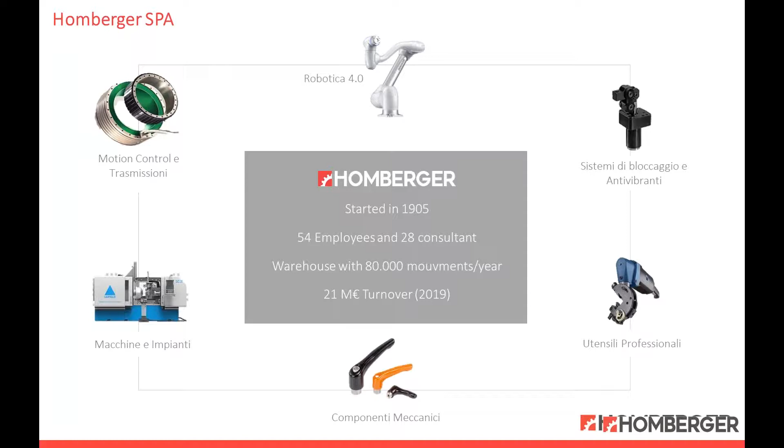This is our robotics business unit. We are the youngest business unit, but we have in our portfolio probably the highest technology available at Homberger. As you can see, we offer cobots from Doosan Robotics, all 3 series. We offer Mecademic, the most compact and most precise industrial robot on the market. Vision systems from Solomon, a 3D random pick system with integrated AI. We are proud to be dealers for OnRobot, one of the widest one-stop shop solutions on the market for light robots. And of course, the Homberger Hub, which is the topic of this meeting.

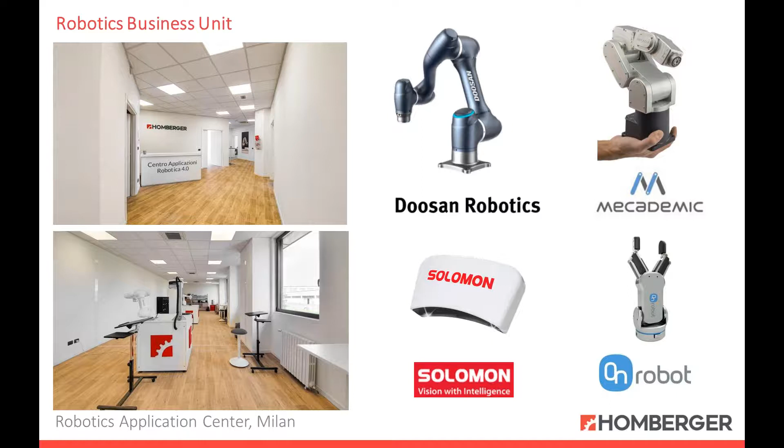On the left, some pictures of our office and our lab. This is the place where all the ideas and features in the Homberger Hub were born. And now, over to Roberto for the Homberger Hub.

Thanks, Matteo. Hi everyone. Let me introduce the Homberger Hub for those seeing it for the first time. Homberger Hub is a software platform to extend Doosan Robotics with additional features and functionalities. When you connect the hub to the robot, you gain Wi-Fi access to connect to the robot, but mostly you gain new functions provided by the apps of the platform. Those apps are RecordBot, VR Studio, and Checkapp.

Setup is super easy - you just connect the hub to the robot, and this generates a Wi-Fi network that you can use to connect. On the other hand, if you already have an enterprise network you want to use, you just connect both the hub and the robot to your network, and you can use your company Wi-Fi to connect to the device.

Okay, so now let's see the apps of the platform, starting with RecordBot. RecordBot is the app of the platform for path recording. Every collaborative robot can memorize and save a single point position, but with RecordBot you can record a whole trajectory, optimize it, and let the robot repeat it. That's why our slogan is: record, smooth, play.

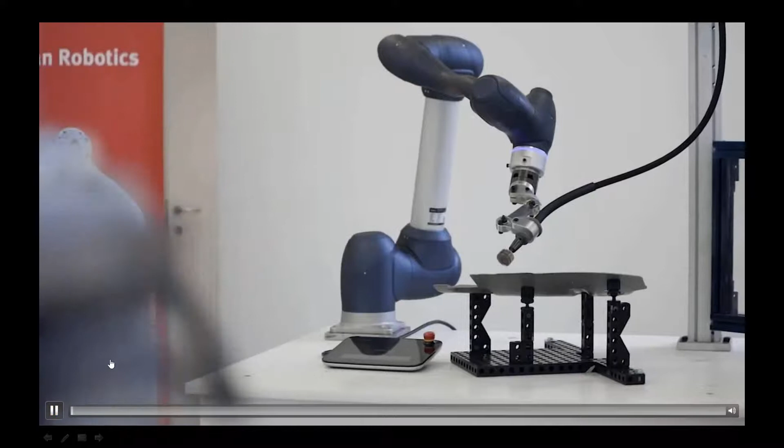Let's watch a video of this deburring application to understand how RecordBot works with Doosan Robots. With RecordBot, you can easily program complex tasks using the direct teaching feature of Doosan Robots. With just one click on the robot cockpit, waypoints can be saved.

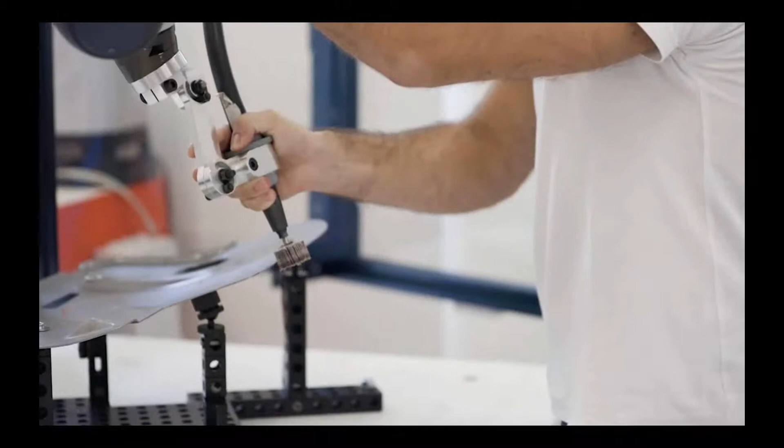With a long click, you can start a recording session. During the recording session, all the robot motions will be recorded - don't worry about movements, velocity, and accelerations. You can even stop and make yourself comfortable.

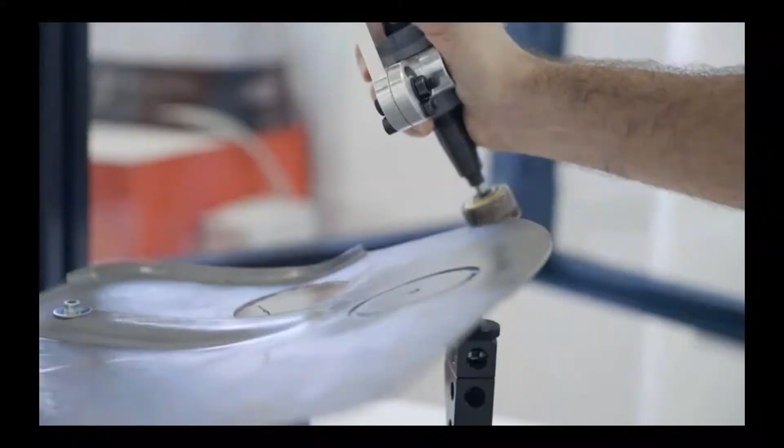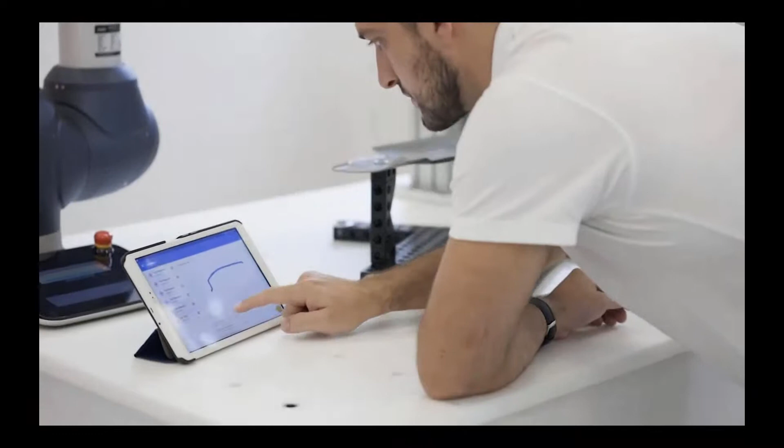With RecordBot, you can easily adjust trajectories later on. Stop the recording session with a long push on the cockpit button. In the post-processing tab, you can smooth your path to remove noise produced by manual guidance during the recording session. You can set velocities, choosing a constant velocity profile if needed, and then test your task step-by-step.

Okay, so you see it's very easy to set up a trajectory using RecordBot. Another interesting feature of RecordBot is simplified force control.

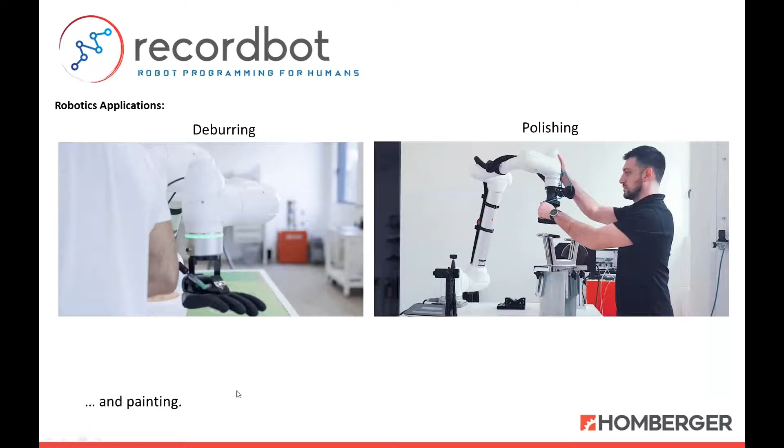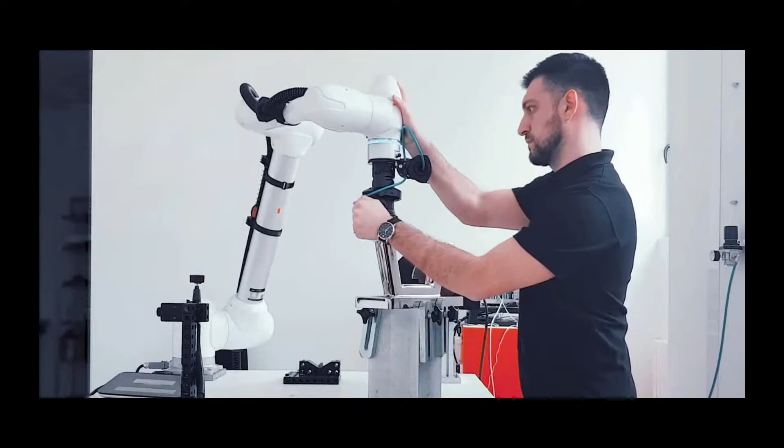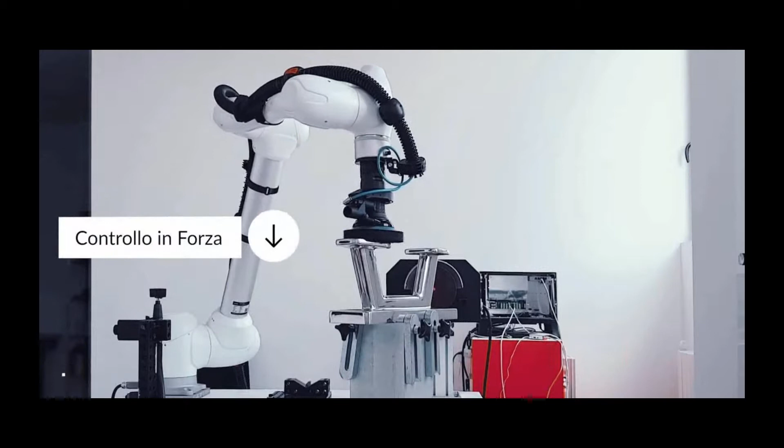For example, in this case, this is a polishing application for a naval component. The operator is recording the trajectory and taking some points, but you'll see when the robot repeats the trajectory, it will also apply force control to grant contact forces between the tool and the surface being worked. So even setting up force control can be done through RecordBot.

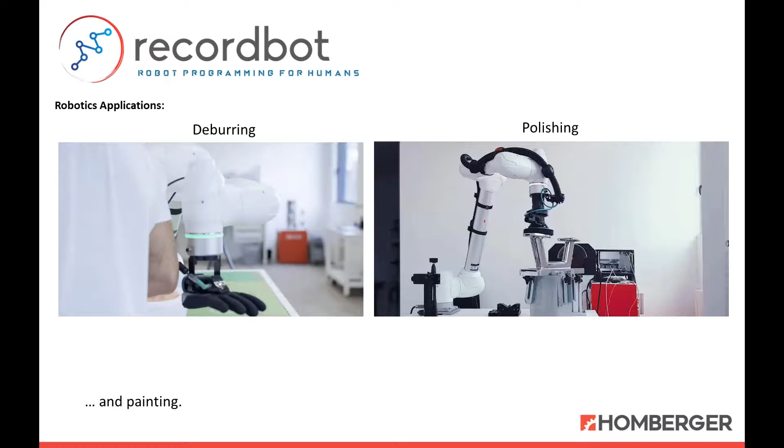As you know, Doosan Robotics can be programmed using Python programming language, and DRL Studio has a lot of features to help you develop Python scripting. For example, you have autocomplete features, syntax analysis, quick fixes, live documentation, smart refactoring, online programming, testing,

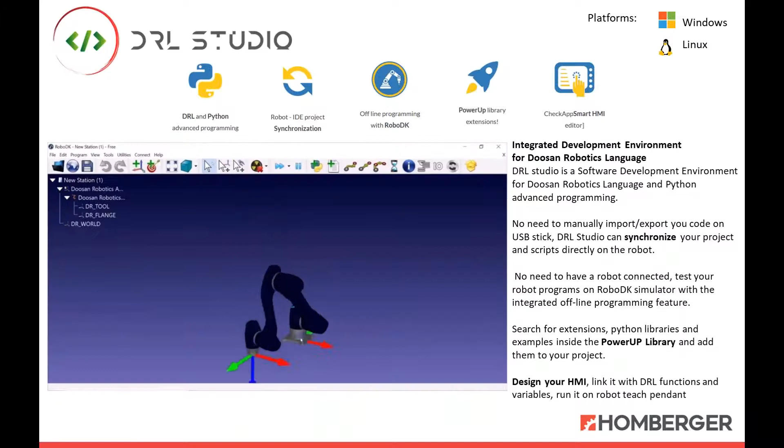logging, and so on, so you actually have tons of software engineering functions to help with Python programming. Then, very important, DRL Studio offers the project synchronization function. So let's say you develop your function, your script, your skill on your PC using Python, and with just one click, you can upload all these Python resources onto the robot controller, and then use them inside the teach pendant, for example with Task Builder or Task Writer.

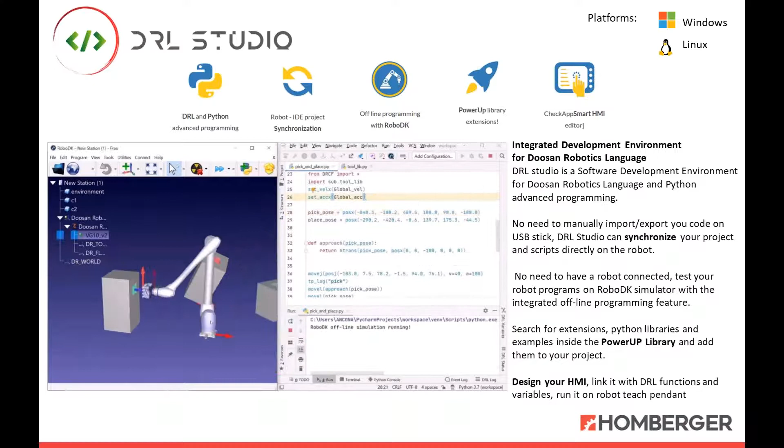As you're seeing right now, DRL Studio is also integrated with RoboDK for offline simulation. So you can test your DRL script inside the simulator, even if you don't have the real robot connected. You can also, for example, move the virtual robot inside the simulator and go on programming.

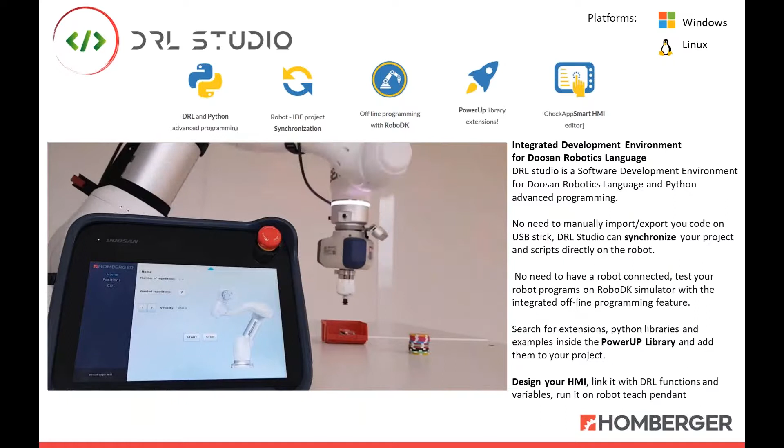In this period of COVID, it's very useful because you can stay at home and go on with application development, then test the real application on the real robot just when you have finished it. Finally, we add two new features of this new release: Power Up Library and Smart HMI. We will see a live demonstration of Smart HMI Editor at the end. For now, let's focus on Power Up Library.

Power Up Library is a space inside DRL Studio where you can download power-ups from the cloud. Power-ups are basically Python libraries that provide specific functions to the robot. You can add a power-up to your project, and each power-up comes with dedicated documentation, so you can check the live documentation to understand how the new function works.

Let me explain a little more about this power-up. For example, the motion lib power-up provides additional motion functions, such as integrated pick and place operations. You also have kinematics commands to check if a certain point is reachable or if it's in a singular configuration. This is very useful because you can know in advance if a certain position will not be reachable or is singular, and so you can implement strategies to avoid them.

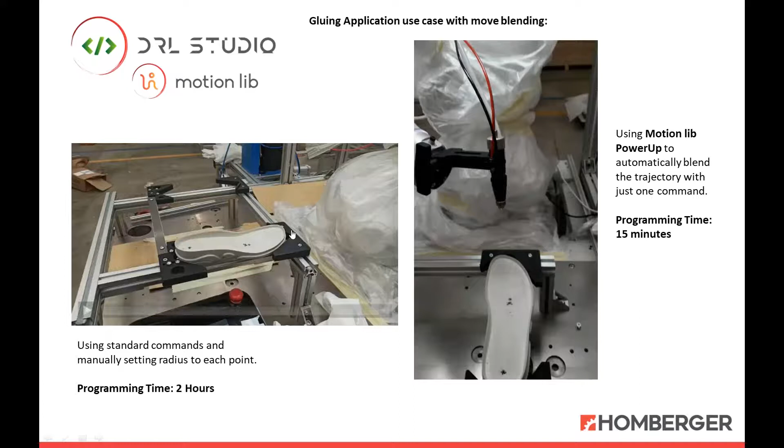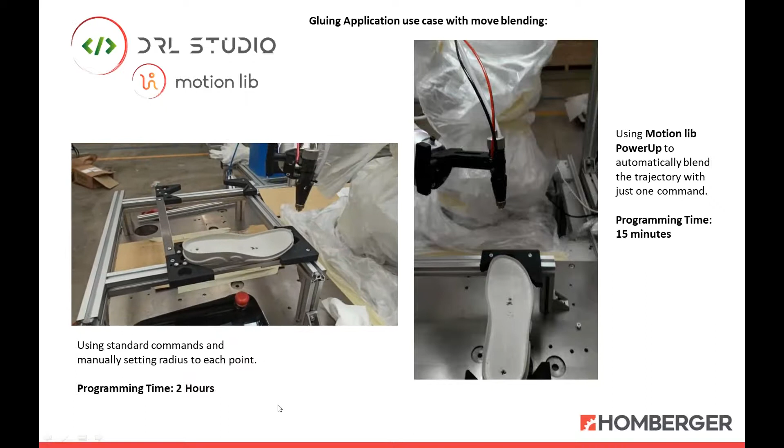Let me show a real application of this function. This is a gluing application, and here on the left you'll see the case where the motion power-up has not been used. We took all the points of the trajectory and spent a lot of time setting the correct blending radius for each of these points. So programming time was very long, and the outcome was not very good because we got this kind of stop-and-go trajectory that was not very optimized.

Instead, here on the right, you'll see the same points, but in this case we used the motion power-up to automatically calculate the blending radius for each point of the trajectory. So programming was super fast, and you can see, even if the streaming quality of the video isn't great, that the trajectory is actually very fluid, very smooth.

As you can see, the trajectory has a lot of points, more than 200. This is a useful command if you have long trajectories, because there's no maximum number of points set for the trajectory. You can have any number of points composing your trajectory.

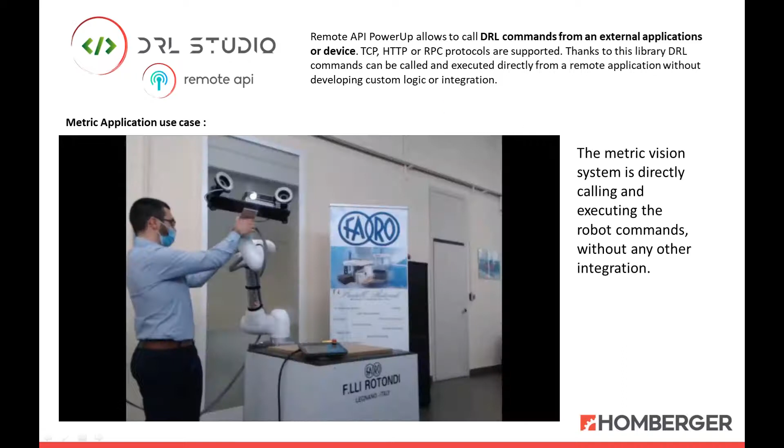I've got a real application example of this technology. This is a 3D vision scanning application developed by our partner Fratelli Rotondi. In this case, it's directly the software of the vision camera that is calling the commands from the robot, saying, okay, move J here, move L there, enable manual guidance.

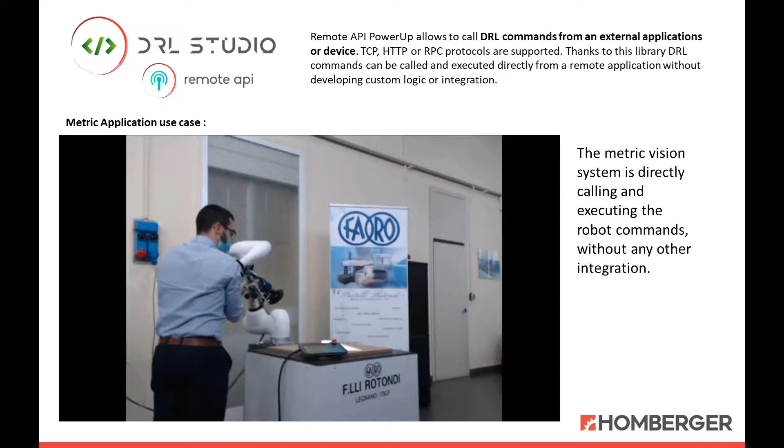So a lot of commands were integrated directly in the software of the camera, without any need for any other integration or protocol.

Then, of course, we have some third-party power-ups for third-party systems. For example, with the OnRobot power-up, you can control OnRobot devices directly. No need for digital I/O, no need for Modbus, no need for Doosan skill. You just have all the functions to control the device directly, provided for the Python language.

You see here we have RG2, RG6, Sander, 2FG7, and VGC10 that have already been integrated, but soon we will have all the other tools added to the power-up.

And then we also have support for the Solomon Vision System. Solomon is a vision system for random bin picking applications, and you can use the power-up to let the robot be a master and command the vision system as a slave, developing your vision application in a very optimized way.

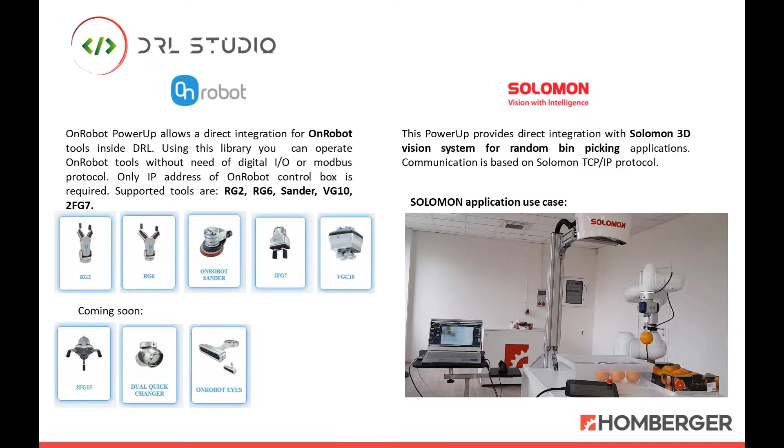Okay, so the power-up library is actually a tool for the community, and we really believe in this approach. So you can enable developer options in DRL Studio, become a developer, and realize your own power-up. And this is very simple.

With just one click, you can turn your Python script into a power-up. At this point, you can choose whether to provide your power-up to end users, or you can also choose to share the power-up with the community.

If you share your power-up with the community, the Homberger team will review it, test it, and evaluate it. Based on how good it is and the functions it provides, we will assign berry points, which you can earn. At the end, your power-up will be published on the official repository.

And you can use these berry points in exchange for free Homberger Hub, and then, of course, start again. So as you see, we really want to let the community grow, and we have this program to reward you for your effort in developing power-ups.

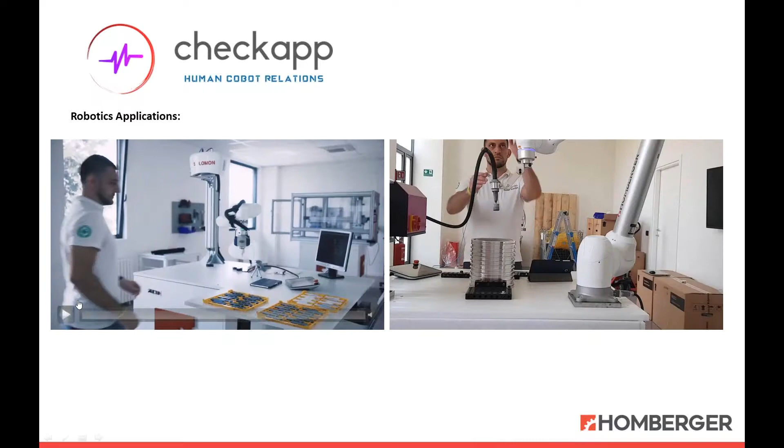Finally, we have the last application of the platform, that is Checkapp. Checkapp is the app for smart human-robot interaction. With this application, the operator can directly check and monitor the status and process of your robotics application, and also actively interact with it for setting up parameters or tasks. I will show you a video that explains how Checkapp works.

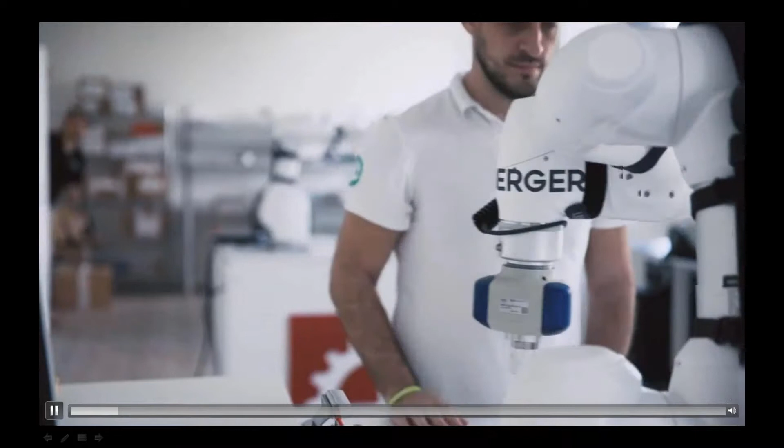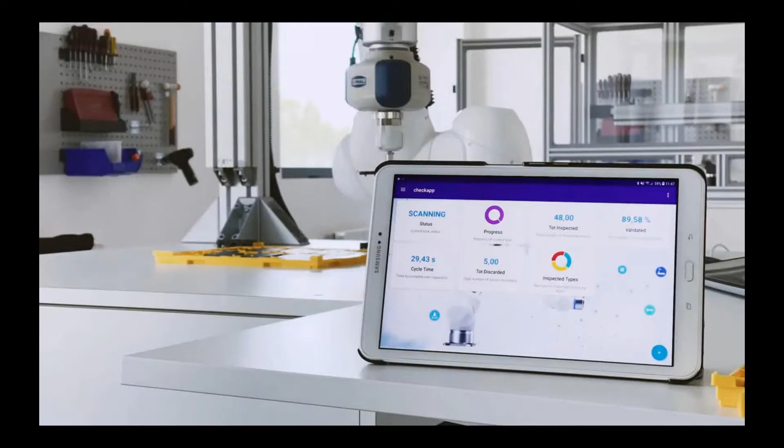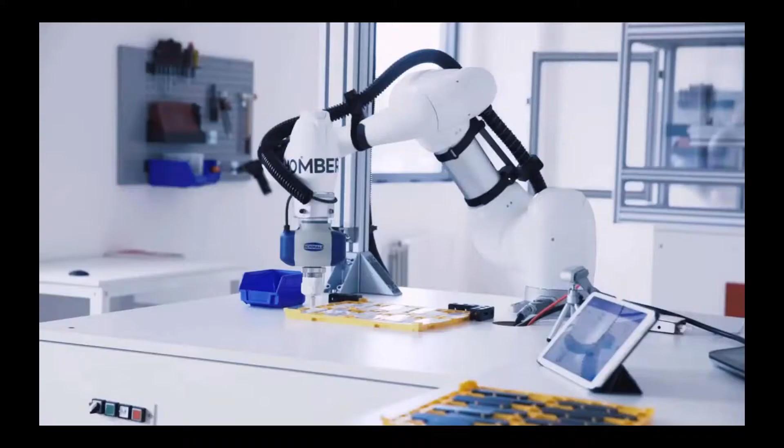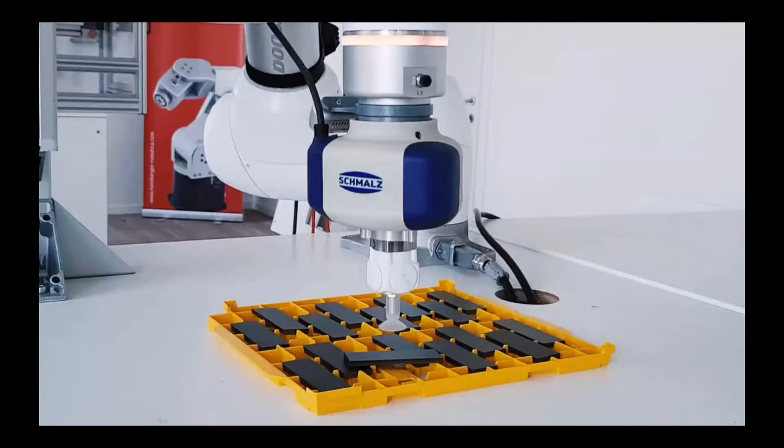Applications are becoming part of our everyday work life. Checkapp is the app for Doosan Robots that helps you build a true smart human-robot interaction. With Checkapp, you can monitor your production process and have instant insight of what is going on. No constraints - any parameter, data, or variable can be measured and viewed on real-time charts. Thanks to Checkapp, your robot is smart. It will send messages directly to your smartphone when human activities are needed. Use the flexible task mechanism to achieve variable and customizable production. With Checkapp, you can easily change process parameters, choose recipes, and organize your robot tasks to reach your daily ever-changing goals. Focus on what really matters to your business. Go on with your activities and let the robot ask for help only when it's really needed. With Checkapp, you can remotely monitor the robot task and receive notifications directly on your smartphone to handle stops and safety events. Enhance your Doosan robot with true smart interaction. Checkapp - human-robot relation.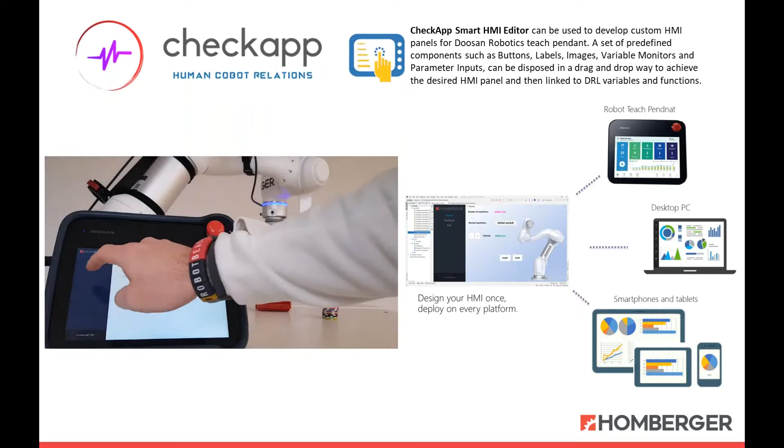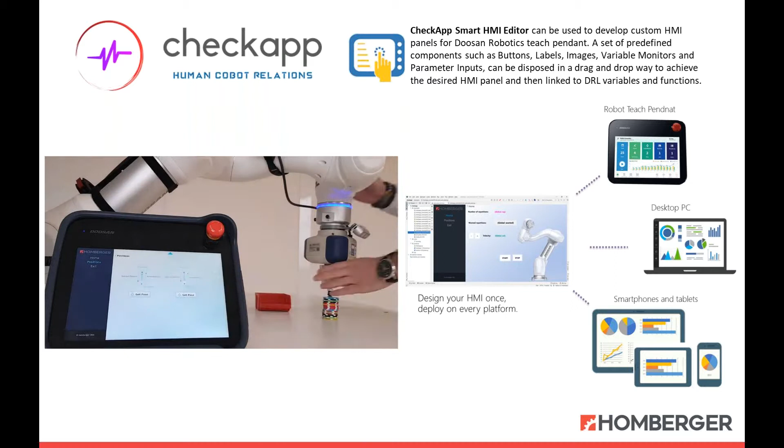Okay, so this is how CheckApp works. Now let's focus on the real new feature of CheckApp, that is the HMI editor. As you've seen, you can develop your custom user interface using DRL Studio, and then deploy this interface on the robot teach pendant, on a desktop application, or on the CheckApp smartphone application. The slogan here is: design your HMI once and deploy on every platform. I will show you a live demonstration of how it works.

So I will open the RecordBot Studio, and I will create a new HMI file. So this is a blank HMI screen. I can add some text to it - for example, I can say this is my text.

In this drag and drop way, I can place it wherever I want. Then I can add a button, so this is my button. And I can link this button with a DRL function. This can be a function provided by the robot, or it can be a custom function that you have defined - any DRL command is fine here.

Then you have some variable monitor component, so you can keep a variable monitored. You put here the name of your variable, and this will be updated in real time with the value of this variable.

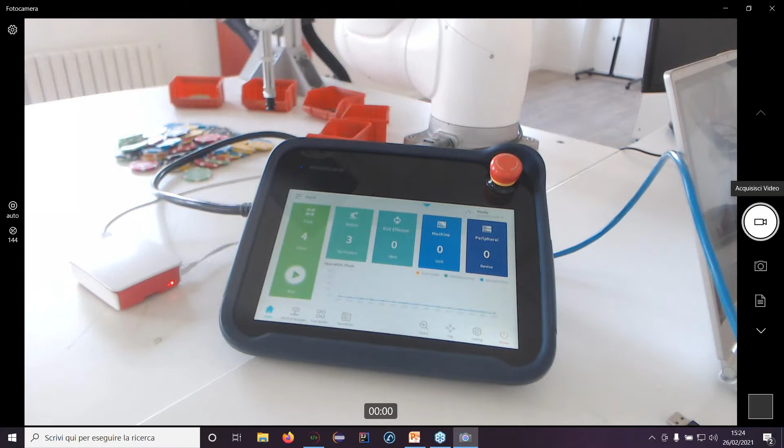And I will try to show you how it looks. So this is a robot teach pendant - this is the standard interface of Doosan. When you launch a new HMI, this is your custom HMI.

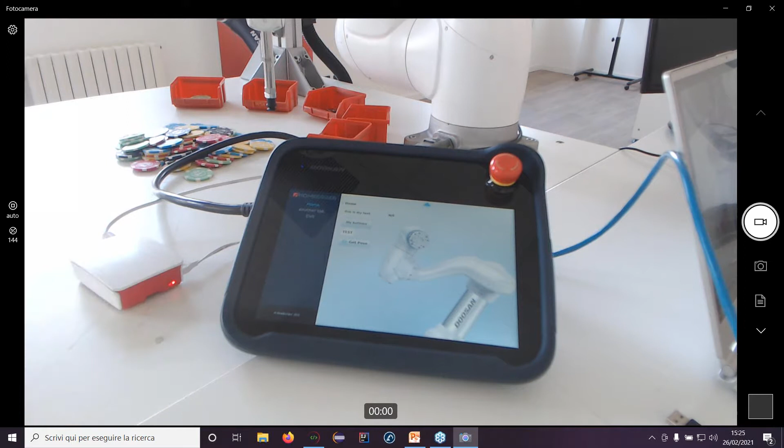So you have the buttons that we have inserted, and you see the operator can insert some text. The operator can take a position and can interact with the application. So it's very easy to set up and powerful to develop collaborative applications where operators can directly interact with the teach pendant.

Okay, let's jump in again in the presentation. All the applications Visual Studio, RecordBot, and CheckApp have been certified by Doosan. So Doosan have tested and reviewed them, and they are available as official plugins inside the Doosan Mate channel.

Let me give you some input about what's going on in the upcoming year. We have released now this new feature that are Power Up Library and Smart HMI Editor. We will release soon a new RecordBot version with pointing and sending function.

Probably during the summer, we will launch this Homberger Masterclass, which is an online channel where you can have all tutorials, all video, all training material joined, so you can learn how to use all the features provided by the platform. And of course, during the year, we will keep updating the Power Up and we will release new ones.